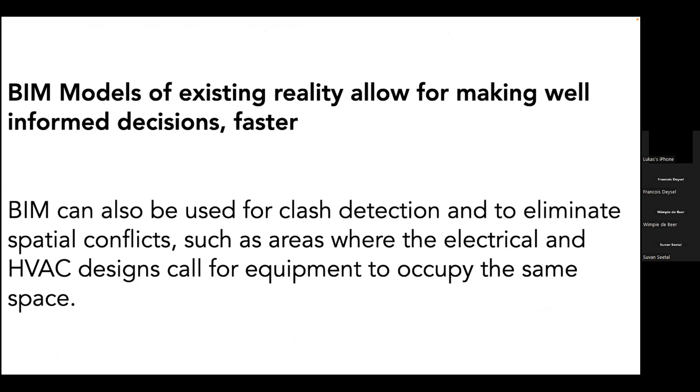BIM can also be used for clash detection and to eliminate spatial conflicts, such as areas where the electrical and HVAC designs call for equipment to occupy the same space.

Other applications include running scenarios, such as the function of an emergency ventilation system, and energy analysis and modeling. BIM can even model the movement of the sun to assist in conducting daylighting studies and optimizing solar panels.

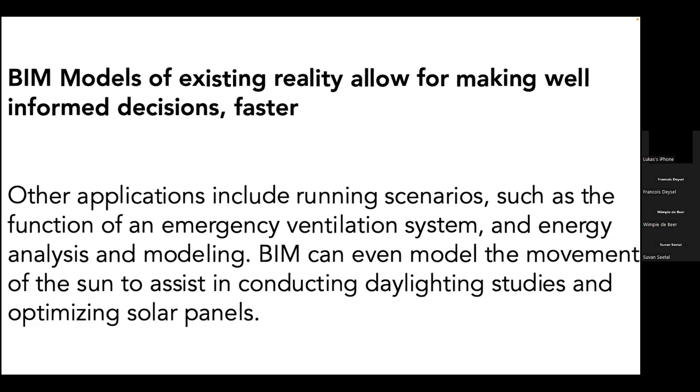In the construction phase, BIM enables faster responses to design changes or site problems, and it supports planning and cost management. BIM enables teams to assess constructability, fine-tune and communicate construction sequencing and contractor schedule, generate material lists and quantities, and establish material delivery schedules and logistics.

Our BIM model also allows owners and facility management teams to manage, plan, and track ongoing maintenance, refurbish, or demolish their facilities more efficiently.

We've been doing these presentations for a few months now, and we've changed it quite a lot since we started. Today, we've added various projects because there are more engineers involved in today's presentation, and when it's more architectural, we concentrate on that.

But the first thing that we are going to look at is the equipment. Ensign, if you just want to talk basically about some of the historical equipment that you've used in the past, and we'll move on to some of the new stuff.

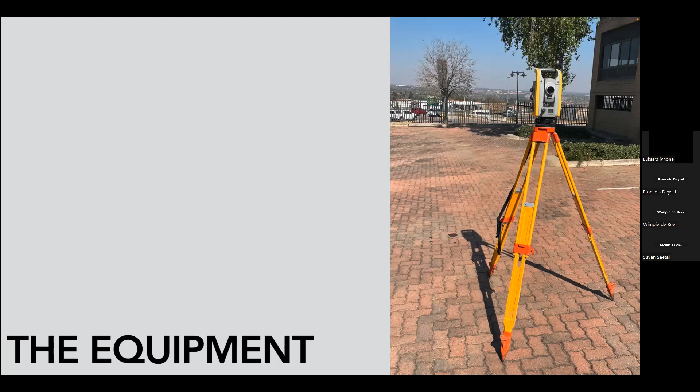So the next slide is an example of a 3D scanner. I went to site with Ensign.

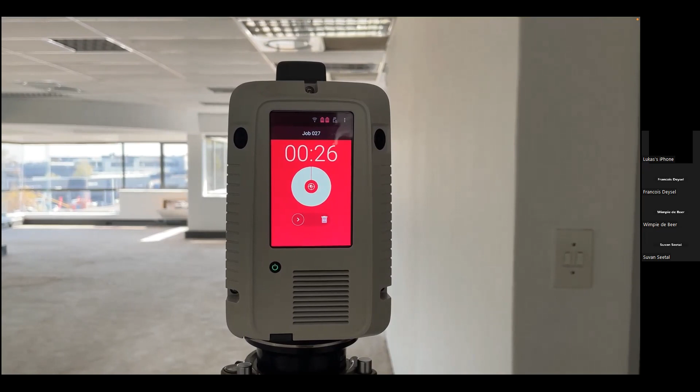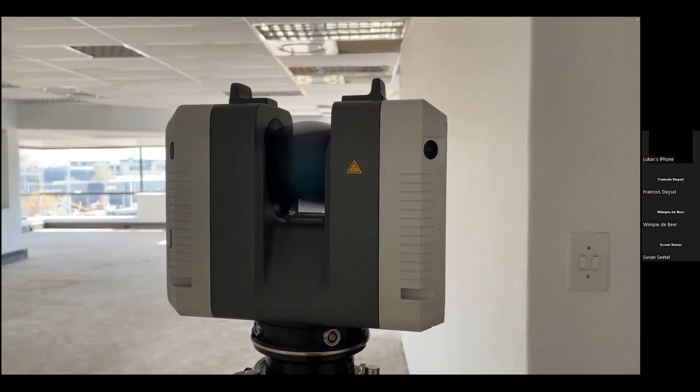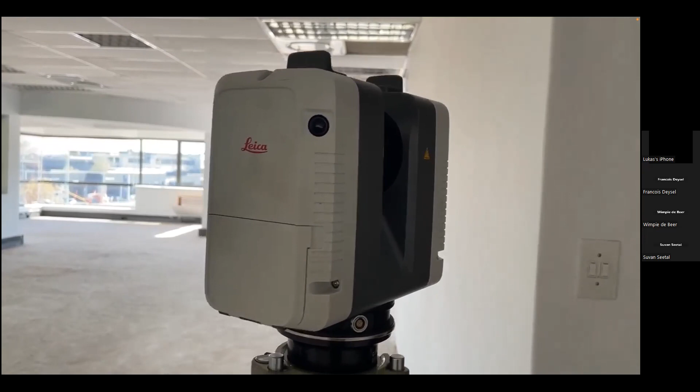If you look at the first point, that is the density of points per square meter, more commonly referred to as the point spacing. So where you would just want to survey a stockpile, or just want to capture a wall layout and floor to ceiling height, you would set this low. But where you're interested in capturing finer details like wall switches, light fittings, or electrical conduits, you would set this higher so that you obtain higher resolution in your 3D image.

The next icon and the next point is scan color. A lot of our clients just ask us to do the scan, and they themselves have the capability to work with a point cloud, but they would like the point clouds to be in photorealistic colors to help them interpret the point cloud. So this is where you can enable the scanner to take photos, and it will align the photos and scans to give you a point cloud that looks very realistic.

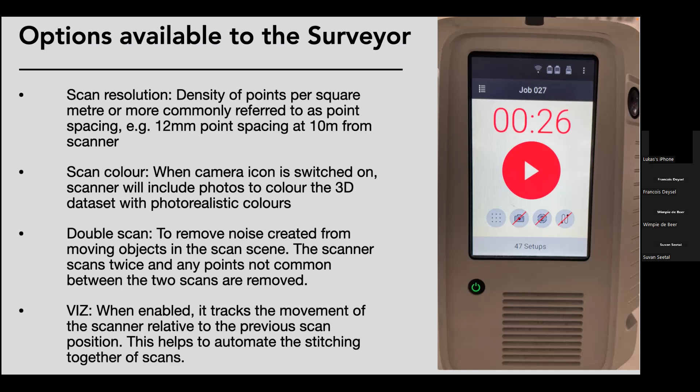So the next one, I went to site with Ensign a couple of months ago, and this was a very typical situation where a developer had bought a building and there were no plans. So what follows is a short 5-minute movie, because I knew absolutely nothing, not that I know anything now, but I knew even less then of what happens on a typical scan of a site.

Okay, so right now we are doing a survey of this building and the surrounds. We are doing a 3D scan and a topographical survey. The building is vacant at the moment, so what our architect client wants is reliable as-built drawings, which they can use to eventually repurpose the building.

There were no reliable drawings. With buildings, mostly the drawings either get lost or there are alterations and they don't update the drawings. So maybe what they have right now is not as it currently stands.

So what we have here is a 3D terrestrial laser scanner. This particular one is the Leica RTC 360. What this does is it measures, using this mirror and the laser, all objects in its surrounds. It basically determines how far objects are away from this position, and from that we get a 3D picture of the laser scanner's surrounds.

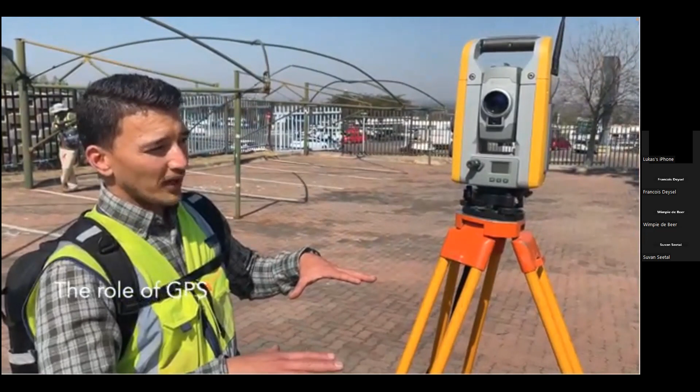For instance, establishing survey points on this site, we use GPS to bring in control from over a kilometer away to establish control on site. Without GPS, using one of these, it would probably take you a day or more just to traverse, bringing control onto site. So yes, we do rely on GPS a lot.

From a distance away like this, where you can actually see the roof, the laser scanner will pick it up because the range of this scanner is about 150 meters. So from a setup like this, where you can actually see the apex and the eave of the roof, it can pick it up. Issues that we have with this scanner is if there's a lot of movement in the vicinity, it picks up that movement.

So people walking about, people that are curious and want to come see what's happening, those people will be in the data as well. So in areas where there's a lot of movement, there's a lot of cleaning of data to be done. That's done by myself, who does the processing in the office. That procedure we call point cloud registration.

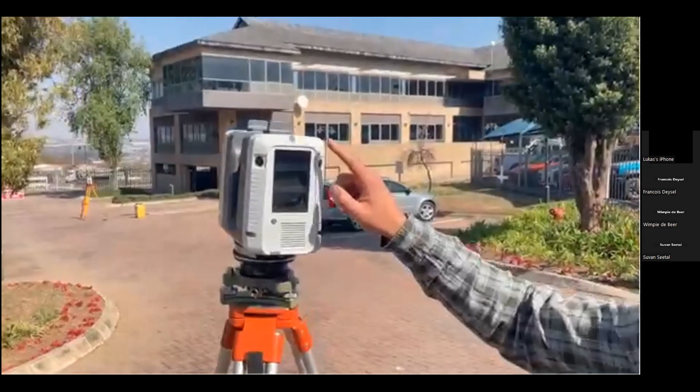Not on this particular machine, you don't get a full scan preview, but you get a small preview which you can just use to see whether the data is there. It shows you the point spacing, which means... anyway, it's fine. So the point spacing is basically the resolution at which it's scanning.

So it's saying at 10 meters away, the point spacing is 12 millimeters. So it measures the point every 12 mils at 10 meters away. Closer than 10 meters, that point spacing will decrease. Before Revit, we need to do point cloud registration, which is the process of taking the individual setups and combining them to form a complete picture of the site.

And does that software come with Leica? That is a Leica software that we call Leica Cyclone.

It'll take you roughly how long to scan this building? Scan the interior? Well, with the exterior and then the interior? Exterior, an hour. And then the interior? Interior, I would say maybe half a day. You have to go into every space? Yes, depending on how partitioned it is inside, how congested. I would say up to half a day.

And how long will it take you to develop the point registration? Also half a day for everything across the whole site. And you obviously had to train on this equipment. How long did that take?

I can't say for sure because I did in-house training. There was no formal training for this. Like most things, you watch somebody do it. A lot of institutions don't offer formal training for laser scanning, only conventional land surveying. It took a couple of weeks to get the hang of it.

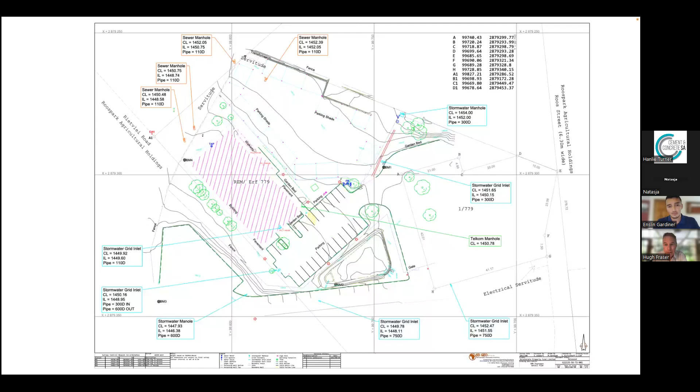So then this was the generated drawing, and these were examples of the point cloud.

Okay, I can jump in here. Sure, so if we think of the 3D scanning process as building a puzzle picture of the entire site, then we can think of every setup as a piece of the puzzle. So what I'm doing in the software I mentioned in the video, this is like Cyclone, I'm basically building my puzzle. I start grouping the scans together by adding one puzzle piece, or one scan, at a time.

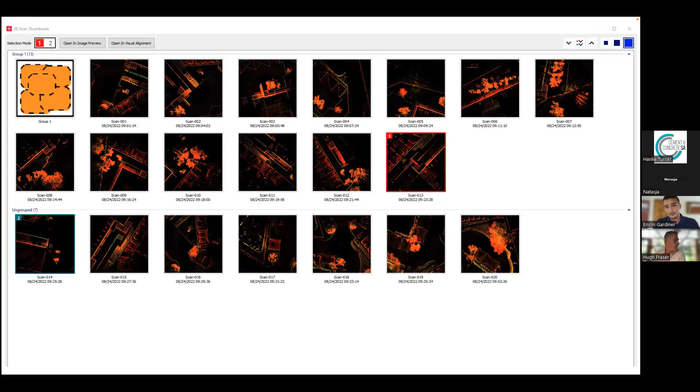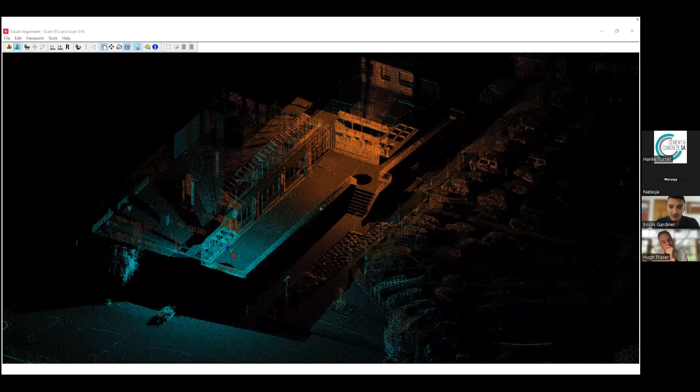So this is just a screenshot showing how I am combining two puzzle pieces. You need a certain amount of overlap between the two setups for the software to be able to stitch the scans together, so we just have to align the two scans using common surfaces. Here you can see we captured a lot of the floor detail, the walls, as well as some of the parking area. Then using the overlapping points, the software will find the best solution to stitch them together. This is the software stitching.

A question: if the resolution is higher, the point cloud is going to be finer. Is that correct? That's correct. Okay, so this is basically the puzzle picture of the site.

I did about 20 scans here, which would have taken me approximately an hour. You can just see the amount of detail that we've captured already. We have the building footprint, the parking area, as well as proximity to surrounding buildings.

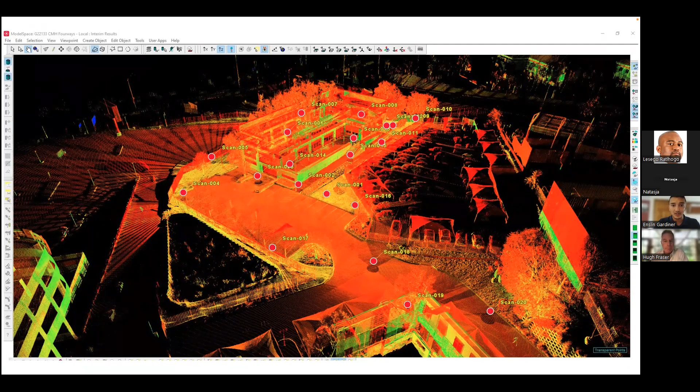This is just a top view of the registered point cloud.

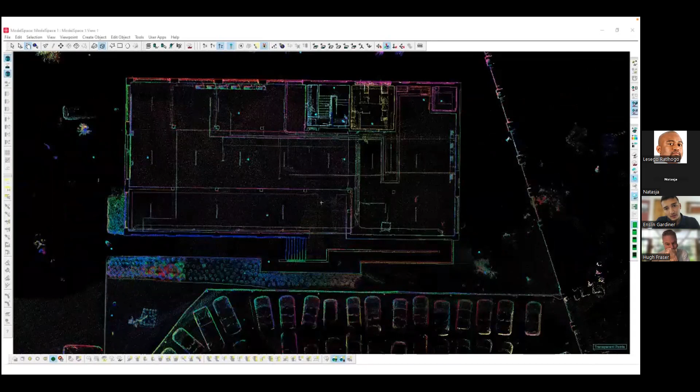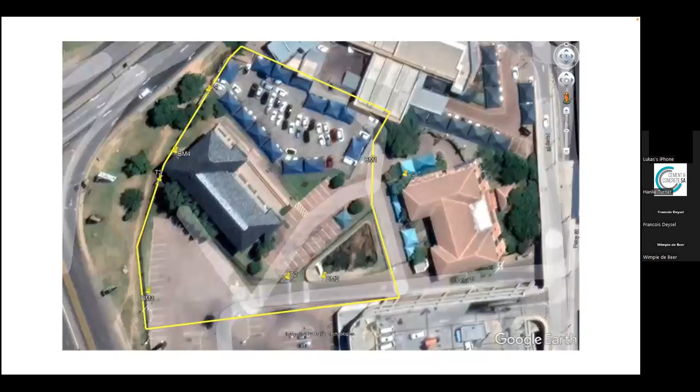So using these common points between the scan point cloud as well as the survey points, we can overlay them and shift our scanning point cloud onto the survey points. In addition, these four points would also be used as a verification check on the accuracy of the point cloud.

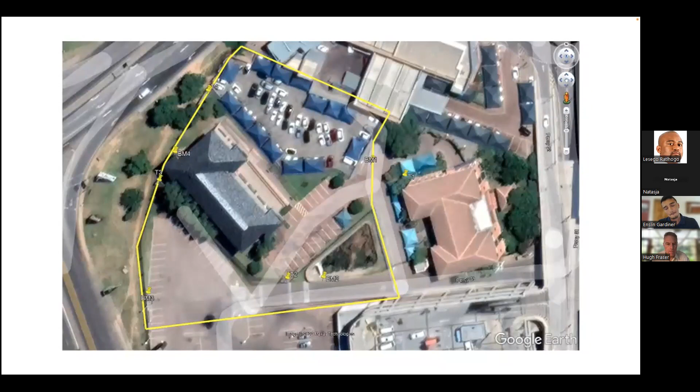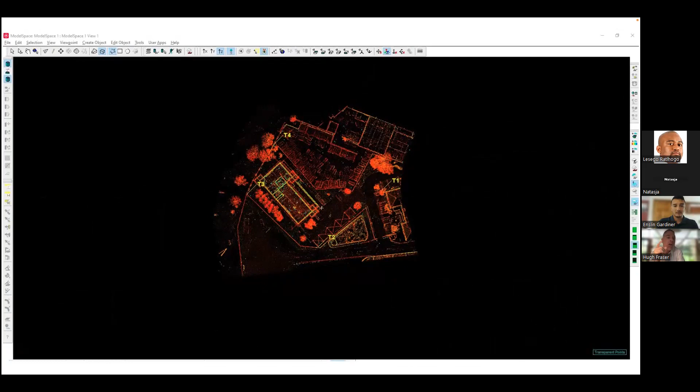So basically the data has been processed by Enslin. Some architectural firms just like to be given the point cloud and take it from there onwards. Otherwise Nina gets the data, and I'll run through the slides and Nina can discuss what she did with the data thereafter.

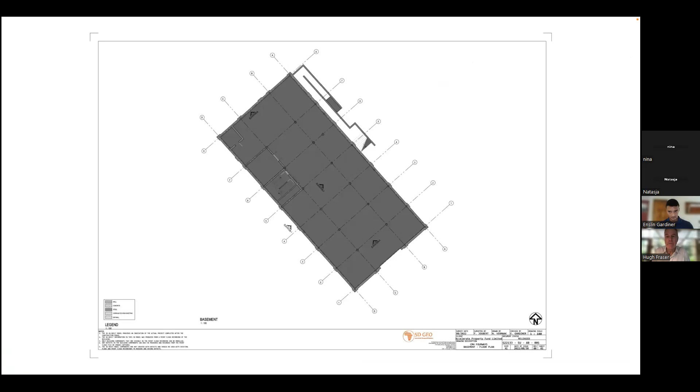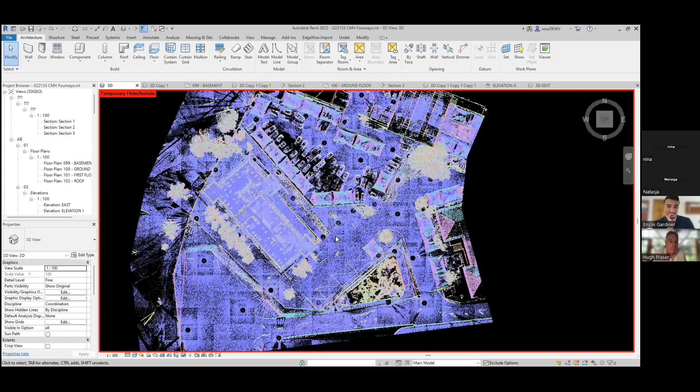Just to show you quickly a bit of detail that you can get from the point cloud. Looking at the outside, you've got manholes that you can get your ground level from, your curb inlet. From that we then basically start your base. This would be your basic structural model that I'll be showing you.

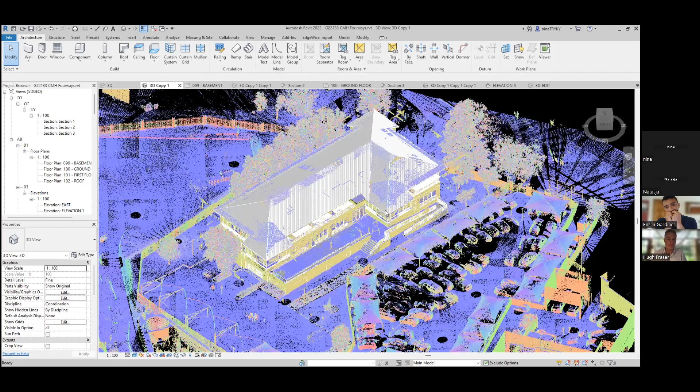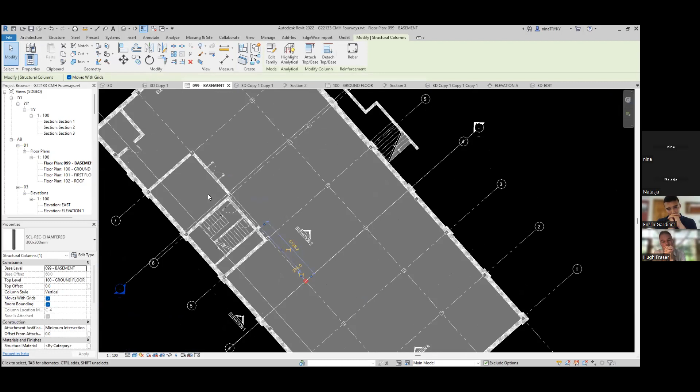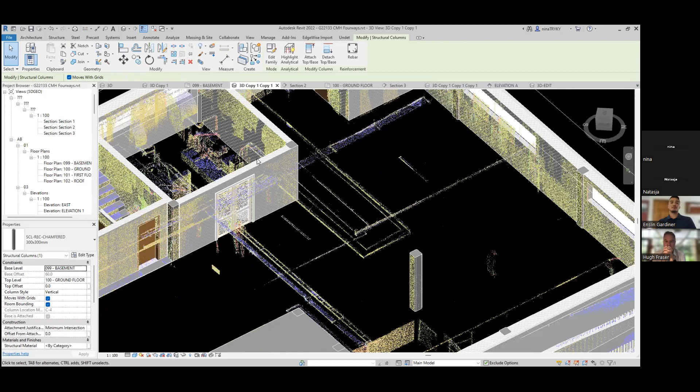Additional detail can be captured from the point cloud as well, that if the client requests we can add onto the model. You'll be able to see the cable trays as well as your fire pipe, and then as well as your mechanical equipment with your ducting as well.

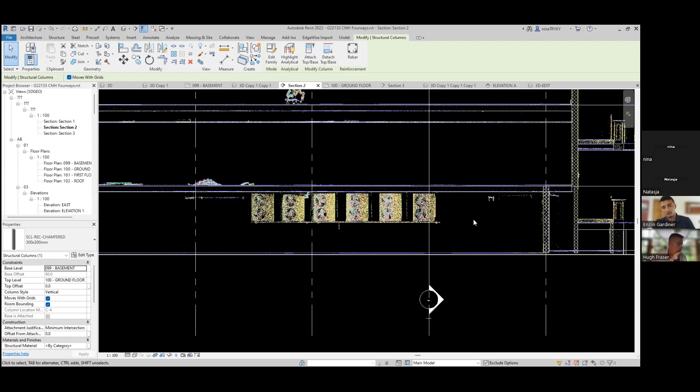Just a side view, once again more detail that can be added because the scan data gives you such a big amount of information. Usually we start off with the base model and then, as per client's request, we build onto that, because we sometimes find they don't need all of this and don't know what to do with everything. So then we do it to client specification.

This would be your ground level floor plan. Once again, detail that can be added is your plumbing fixtures, your piping, and just to show the density of our point cloud on these projects, what you can also capture.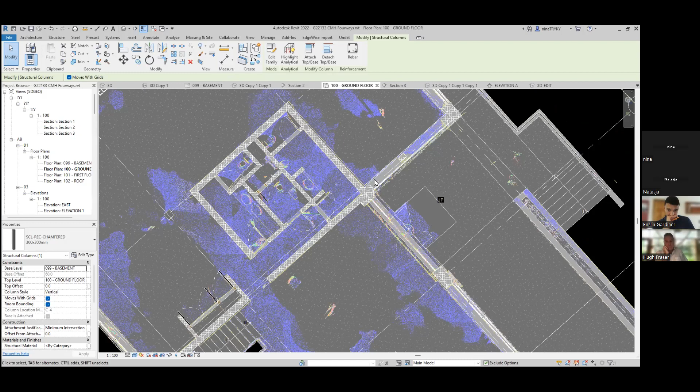There you'll have your electrical plugs, there's a plug as well as there, as well as your fire equipment can also then be captured.

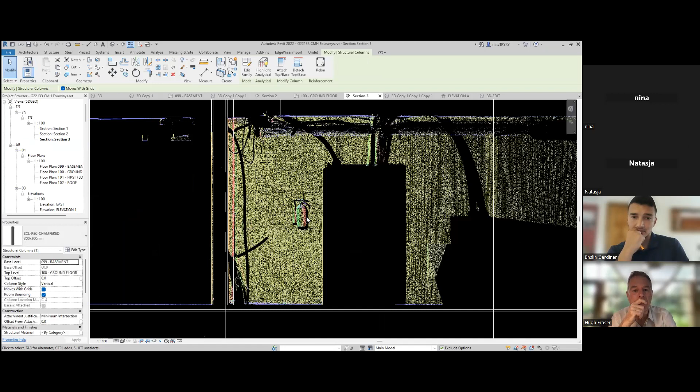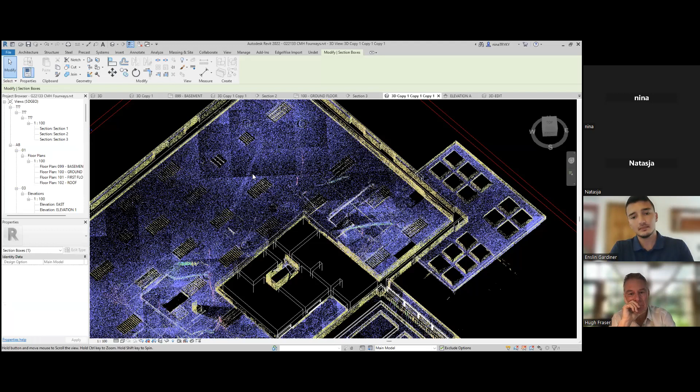Then moving up to your ceiling and your slab details. That slab detail can also be included into your model if you want to do a structural analysis or build on, as well as your lighting, what lighting has been used in the building, all your ventilation systems, down to the smallest detail of your fire sprinkler system as well. Everything's very clear in your point cloud.

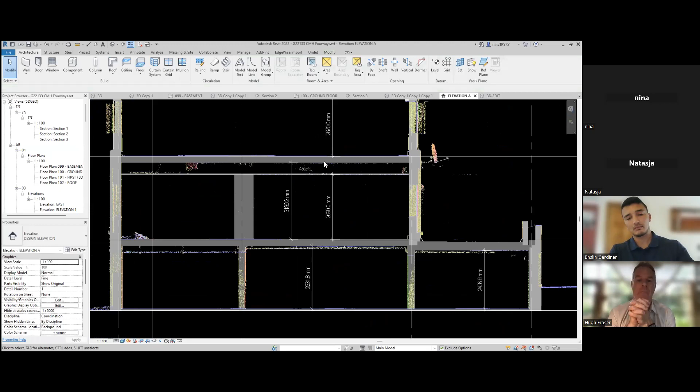One of the deliverables as well is then your section and elevation views, that you can do accurate analysis and planning from that point forward - how much you can still fit in your ceiling voids, what your slab thickness is.

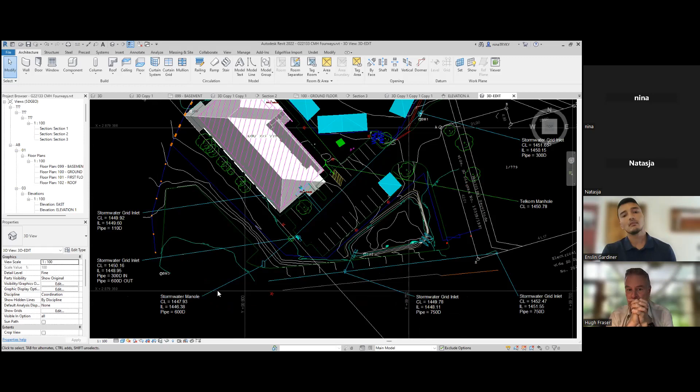And then complete product at the end. If you incorporate your topographical survey with the model, you've got a full, accurate layout of your entire site, from cadastral boundaries to your building model. And then we can incorporate, with the survey of the total station, your manholes, your services, your underground detection - so you've got a complete overview of your entire site.

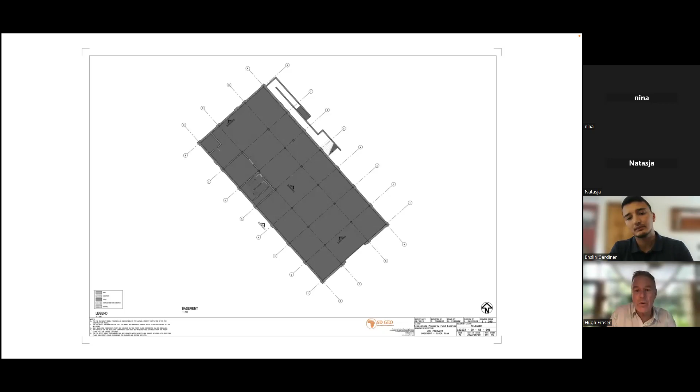We're going to talk about two other projects that I think will be of interest. One is a very large hotel in Windhoek that Enslin scanned during December, and the other is more of an engineering type project that was in Tongaat. Enslin, if you would just describe briefly or give an introduction to the project, the Safari Hotel in Windhoek.

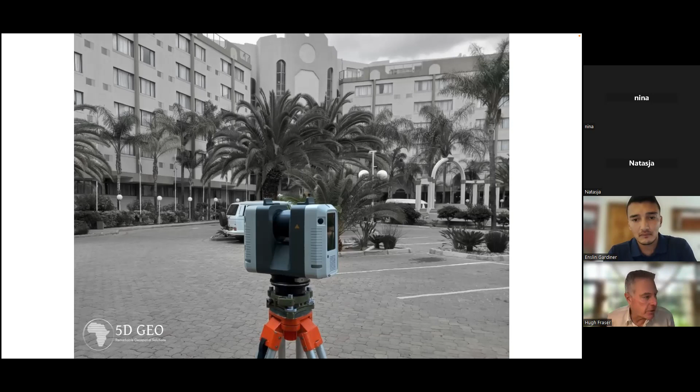And the one thing that was of interest to me that you mentioned is that you had to work around the fact that the hotel was still operating, so there were still guests in and out, which was an additional hassle. But yeah, obviously you got it done.

As is the case for most of our projects, access is the biggest issue. They were going into their busy season, and we could only get access into the guest rooms when the cleaning team went in, maybe 4 hours a day. That effectively cut our productivity in half, so that was our main issue on this project.

Typically we would start the scanning outside so that we can get a base data set or skeleton of scans that we can then link the interior scans to. So the operator would set up a scanner, make sure it's secure, and then bubble it before starting to scan.

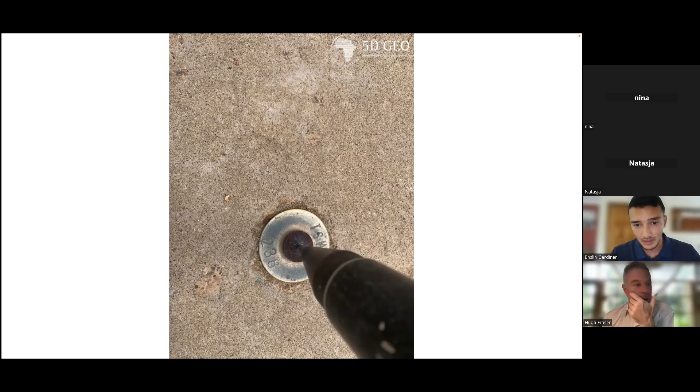This is one of the town survey marks that we would find in Windhoek. You can't see it now, but this is the base of the GPS pole I spoke about in the video. We measure that point very accurately using GPS, and then make sure we measure common points in the scanning data as well. Using those two sets of points, we can shift our point cloud to be in agreement with the national coordinate system and make sure north is facing the top of the screen.

Those TSM points, are they still fairly accurate and up to date throughout at least South Africa? It depends on where you go in South Africa—some cities don't have them. Position-wise they're accurate, but in terms of elevation above mean sea level, it varies.

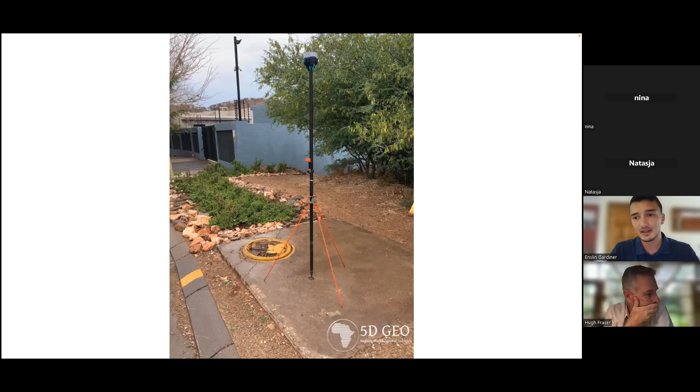So then the next thing that Enslin introduced me to was A360, which has apparently been around on Autodesk for a couple of years, which allows clients to look at the drawings and comment on them, but not edit them in any way. Is that correct, Enslin? I'll just run through these drawings.

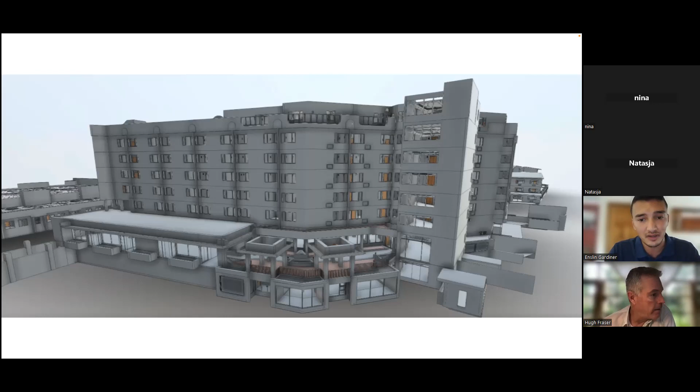Yeah, that's correct. So we would upload a model to the cloud and share that with the client to examine and see if they're happy. They're able to comment on anything they think is missing or looks funny, and they can even extract measurements as checks. Then, depending on if they made comments, we would update, upload again, and finalize before delivery.

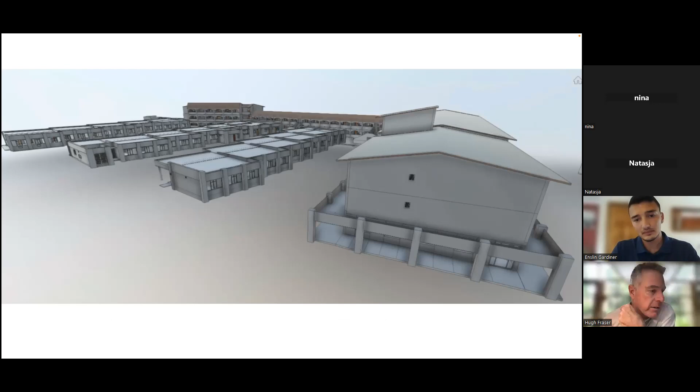There is quite a lot of detail on these renders, but I imagine you could up the resolution and get even more detail. Yeah, what we extract, or what Nina's team extracts, just depends on the client requirements.

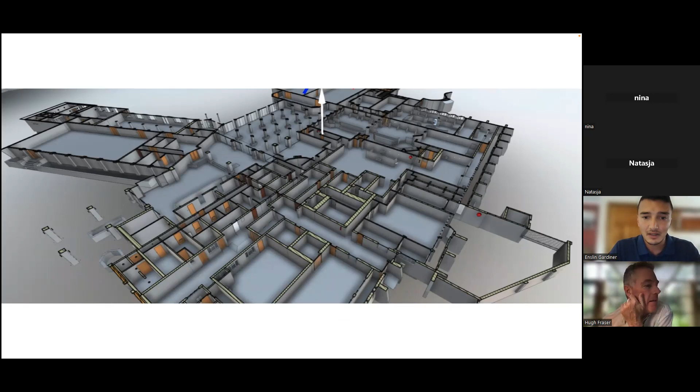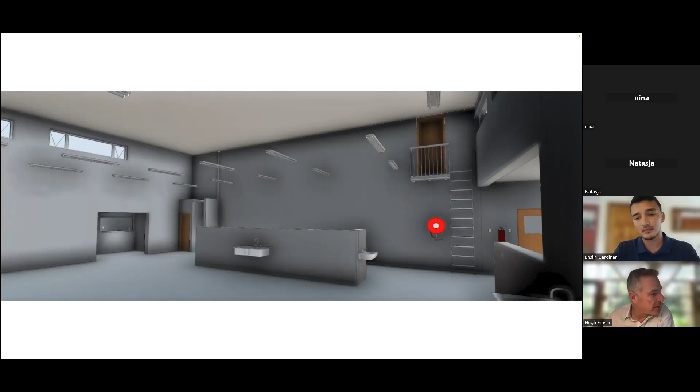Looking at this, I think our client was very interested in the floor layout, so they could easily extract floor plans. We included services like plumbing fixtures, lighting, and fire equipment. As an architect, and someone who recently went to measure up a house myself, I know there's probably no way I could capture this amount of detail. For example, just to position a light switch, like the one on the right-hand side, would take a couple of minutes by hand. The level of detail here is quite extraordinary.

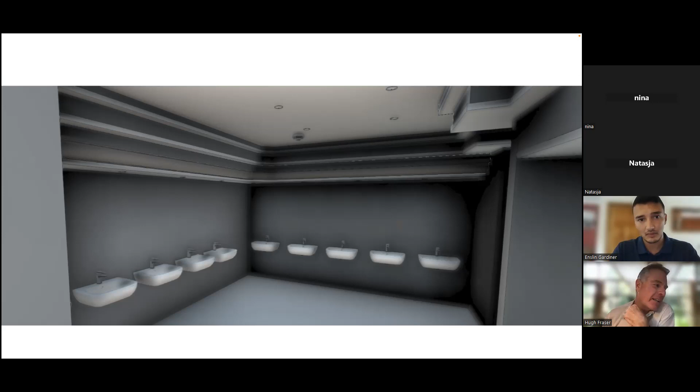Oh, I see there are no mirrors in here. Were there no mirrors? But I remember you saying mirrors can be an issue. Mirrors are a problem for field work, because if the scanner is right in front of a mirror, it will scan the reflection it sees in the mirror as well. So you would essentially get a mirror image of the room you're scanning in the data. So mirrors usually have to be covered up in the field, or cleaned out in post-processing.

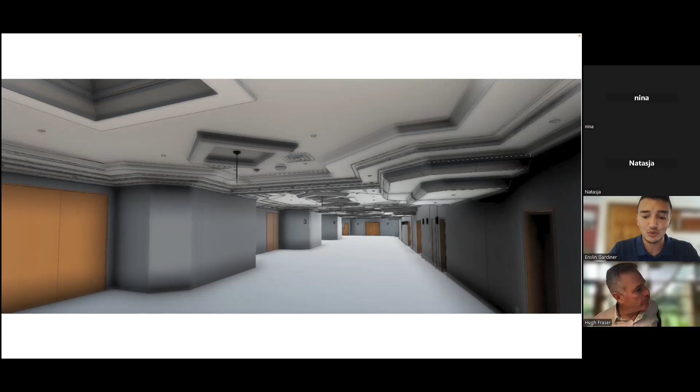Mirrors are also not something a client usually asks for, since they are not permanent. I see we've got a question from Heinrich: does that also apply to water bodies?

Yes, water is another issue. So if there are puddles lying on the floor, you could see in your data that it looks like there's another floor below the one you're scanning. So where there's water, those scans also need to be cleaned out, yes.

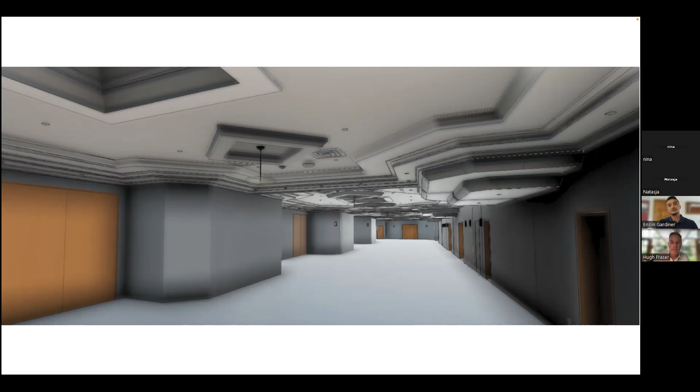This just shows the amount of detail captured on the ceiling bulkheads, as well as the ceiling services, your lighting fixtures, your smoke detectors, your vents.

Okay, so that's the last one. Actually, I forgot there are two more buildings. The one was the Fredman Drive building, which is an office building. Enslin, are you happy to carry on talking about it, or do we need any input from Nina? I can carry on, and then Nina can just give her input.

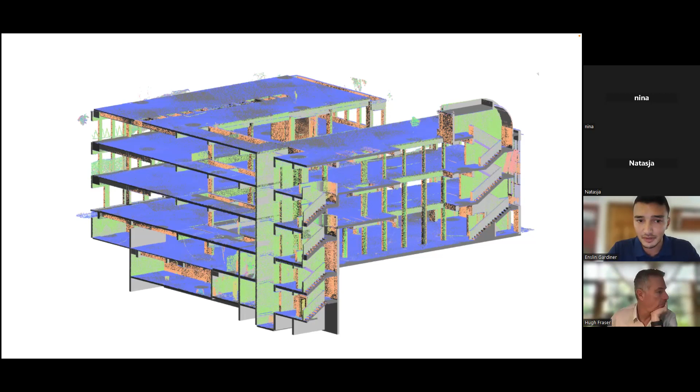Fredman Drive was a building which our construction contractor client basically stripped down to its bare concrete shell. What they then needed was an as-built survey of this building to hand over to the engineering team for BIM collaboration. So we went out once it was stripped down to its concrete shell, did the scanning, and provided the client with this 3D model that you see here.

Of particular importance were the beams on the underside of the slabs. Trying to capture these beams using conventional methods would have taken weeks, where we captured it using 3D scanning in 2 days. I think this is of particular interest to the concrete industry, both the professionals and the contractors as well.

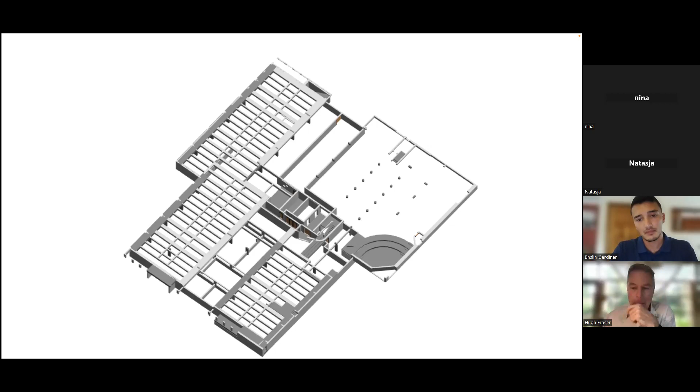It's just the image of the point cloud and the 3D model which was generated from it, and that's a real world photo showing the layout of the beams. We'll come on to heat maps a little bit later, but I think that's also of particular interest.

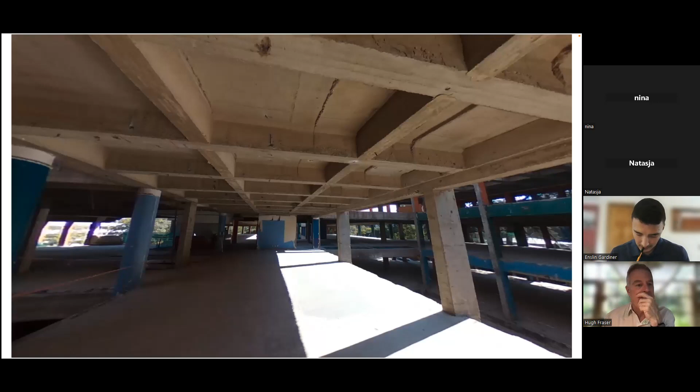Was there anything you wanted to mention regarding the last project, Nina? No, I've been in contact with the architect. They still actually phone us because that job is on its final stages and they're busy doing the installation of services, and between HVAC and electrical, they've got millimeters to work with. So that has really helped them in the sense that they're all working off one design and can work from each other at that millimeter accuracy, saving the cost of not buying extra materials.

Okay, so the next one is Tongaat Mall. Enslin, if you'd just like to briefly describe the project as well. Okay, so our client here was a structural engineering firm, and what they needed to do was know exactly what had been built, since the project had changed hands a couple of times, so they could no longer trust the existing plans on site. So they called us out to come and measure up these steel structures that you see here, for them to then extract dimensions and finish the design and plan for steel fabrication.

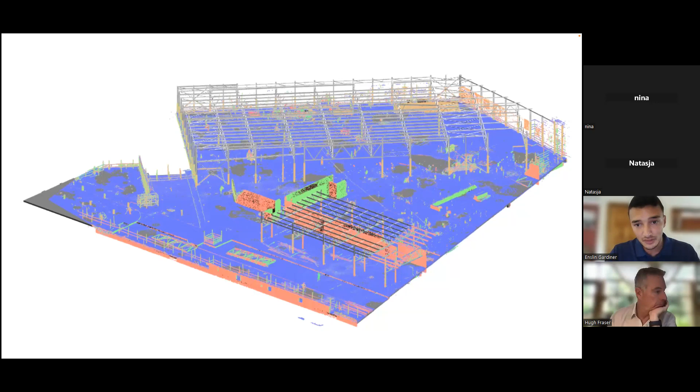So they called us out on site to measure the layout of the steel, the sizing of the steel members, down to the nuts and bolts. They wanted to see where the nuts and bolts were in the steel members.

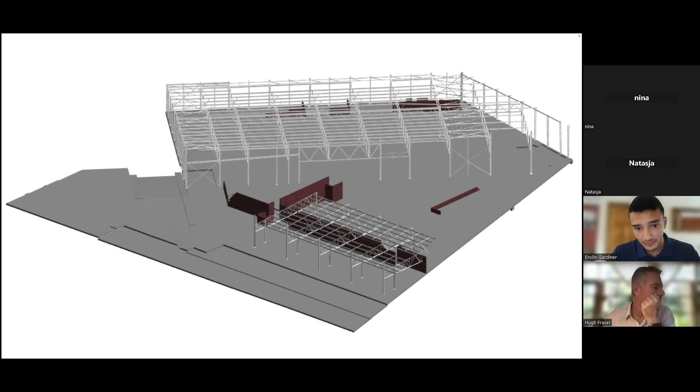I think concrete too, Nina, can you just confirm that the concrete here was also important, like the change in level across the slab, as well as the support columns on the underside? Yes, yeah, those were of particular importance to the client. We actually still do additional work for him on this job.

I think the one plus point he's got is he's sitting in his office and someone phones him and questions one area, and he just phones us and we've got the scan data available, so he can have his answer within a day, 2 days max, where we don't have to send someone out to site to actually go and measure it up, with all those costs involved as well.

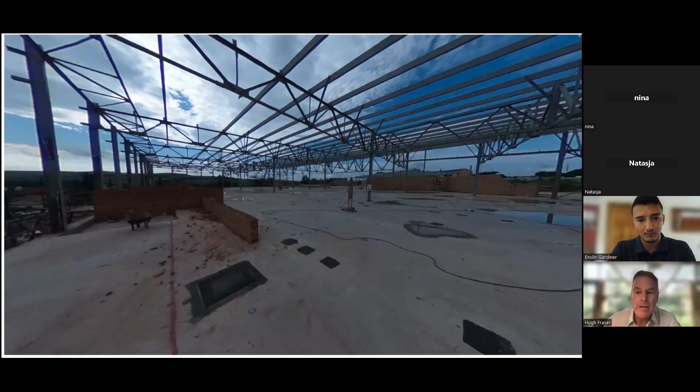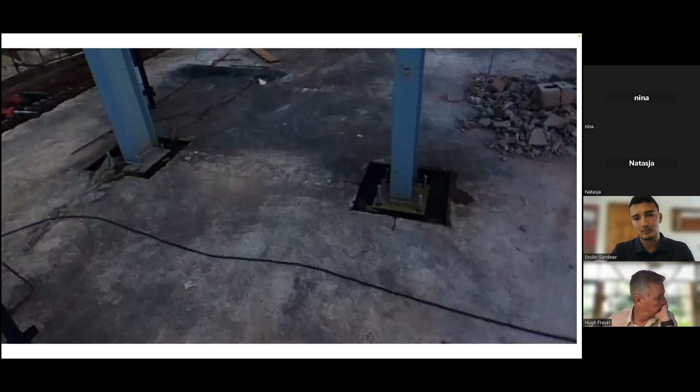That's a good point, which you've mentioned before, that all the data is being stored, and even if you're not using it, you can go back into the archive and retrieve information you hadn't looked at before. Yes, you've got to keep in mind this is still an active construction site, so you'll have to keep notes and let the client know. You keep dates, timestamp everything, make sure nothing in that particular area has changed. But if I scanned your house two years ago and you come back now wanting additional information, it would more or less be the same, so I can use the same data set captured two years ago.

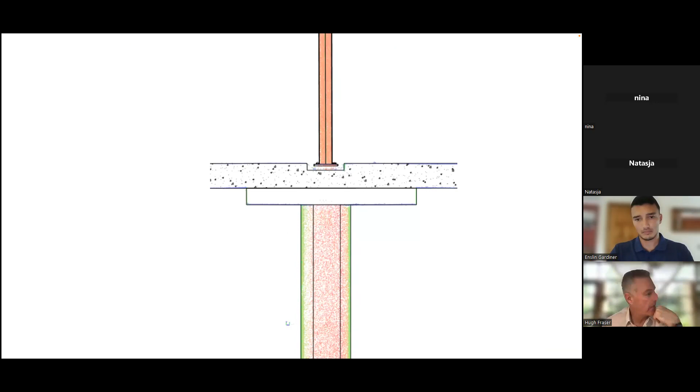I think this relates to the bolts and the members you were talking about. Yeah, so they wanted to see the positioning of the holding down bolts and the size down to the millimeter.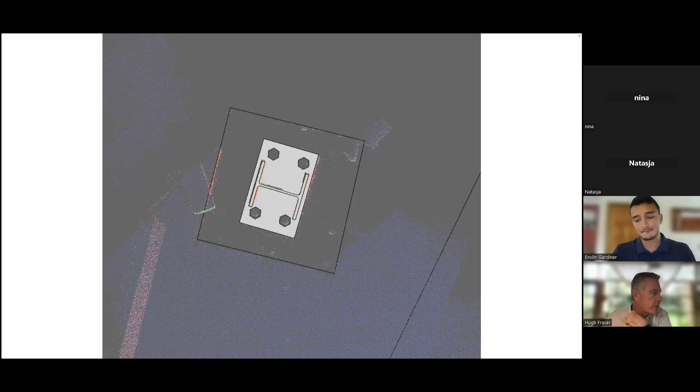Okay, and then the last thing we were going to look at was heat maps. The level of accuracy is so high that you can actually detect micro differences in the levels of floors, which I think would have particularly good application for the concrete industry. Although it's called the heat map, it's actually an elevation map, so it allows you to see the change in level across the floor, which is quite extraordinary.

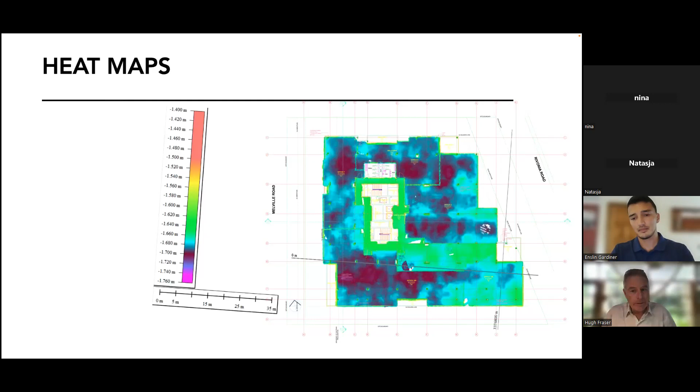Okay, I think that's wrapped up our presentation. I think there are going to be some questions and discussions. I'm going to stop sharing my screen now.